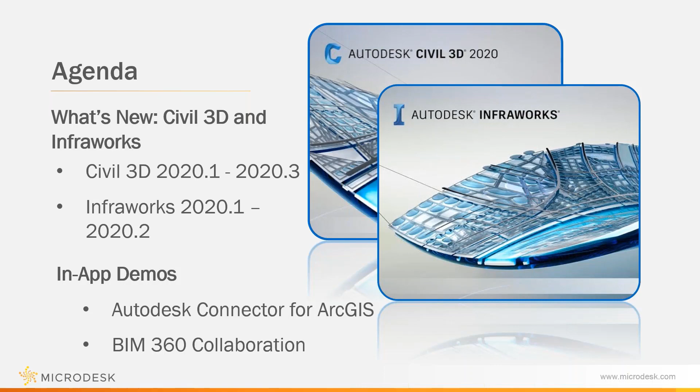Starting off, we'll start with Civil 3D side of things, starting with 2020.1. We have a lot of new features and enhancements here.

The Autodesk Connector for ArcGIS is going to leverage GIS data from ArcGIS Online to create intelligent and dynamic Civil 3D objects. Users also now have access to saving the model changes in your Civil 3D model back to ArcGIS, in addition to publishing a new model to ArcGIS.

The dynamic rail feature lines now allow railway project users to generate, edit, and export parameter-based rail lines that dynamically adjust to modifications of the parent rail alignment, profile, and cant.

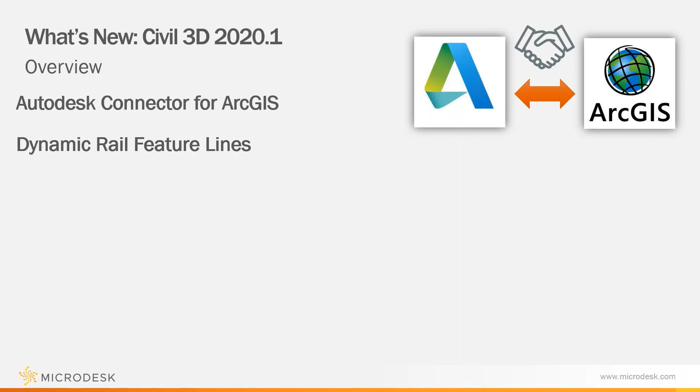Other improvements made for the 2020.1 update include improvements to the reference templates workflow, improved LandXML support for the data exchange of feature lines, gravity network analysis, and improved design efficiency for viewing pressure networks in profile view.

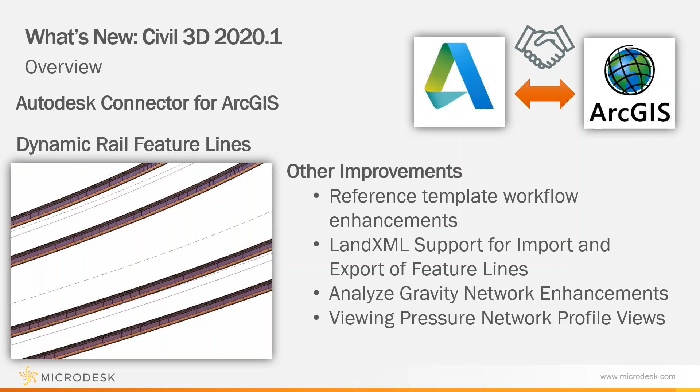The Autodesk Connector for ArcGIS provides an interface for serving GIS data directly and dynamically from ArcGIS to a Civil 3D model. Users can generate alignments, points, feature lines, parcels, and gravity network objects from compatible data types on ArcGIS Online. To access it, click the Insert tab, locate the ArcGIS panel, and click the Autodesk Connector for ArcGIS button to activate the app.

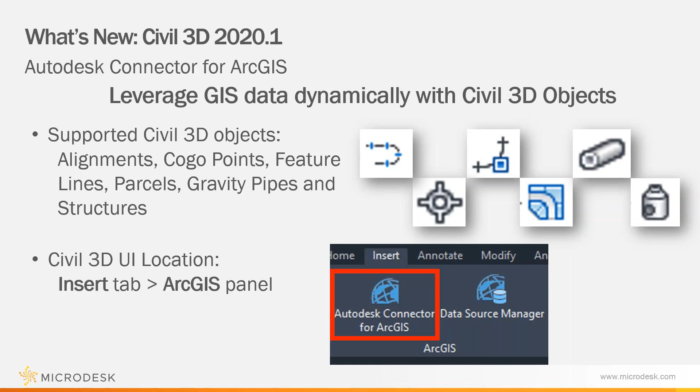The Autodesk Connector for ArcGIS allows users to rapidly and easily create Civil 3D objects from an ArcGIS Online data connection. Search by location and choose an area of interest to import into the map view. You choose which map data to connect to, and this exposes a listing of the data in the feature layers that can create Civil 3D objects.

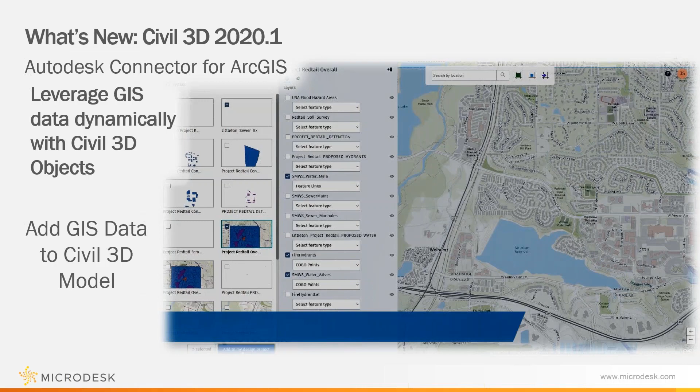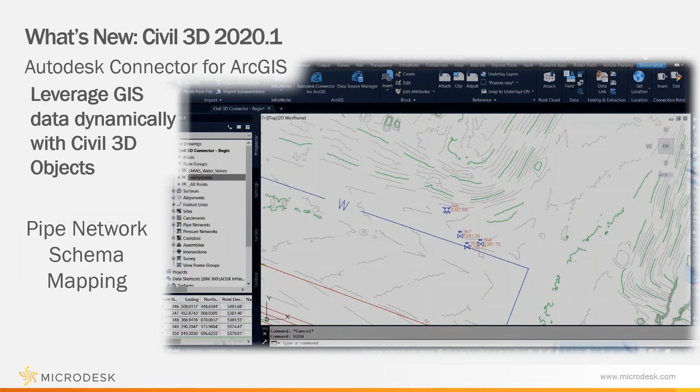From there, you set the model output and choose the object types for each map feature and add to the model. When you're using pipe networks, you can map network schema and move all of that data over into Civil 3D from GIS into the pipe network model.

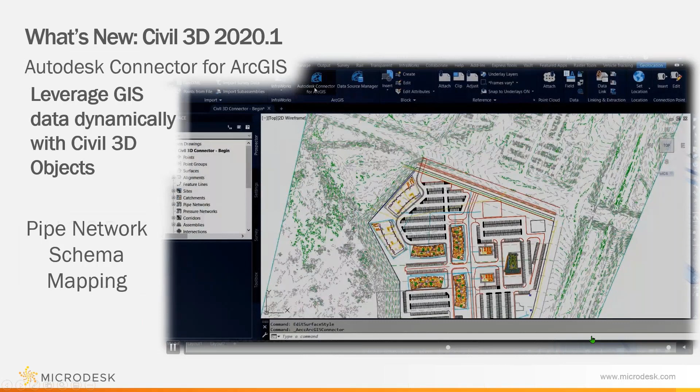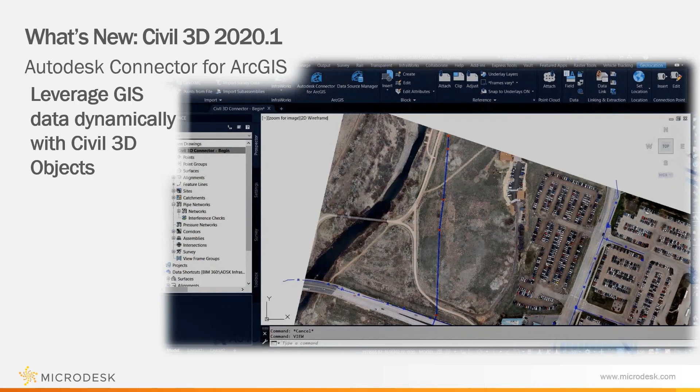Oops. Apologize there, a little technical glitch.

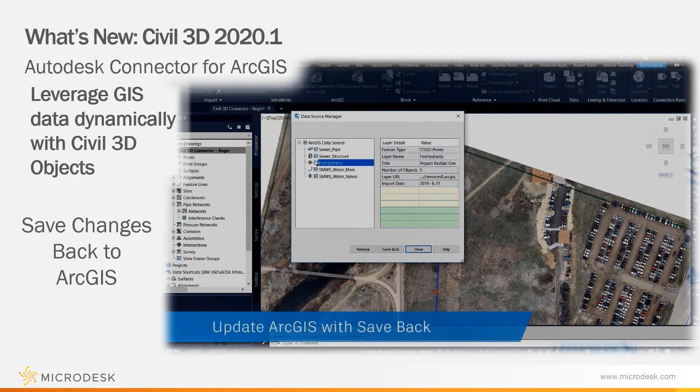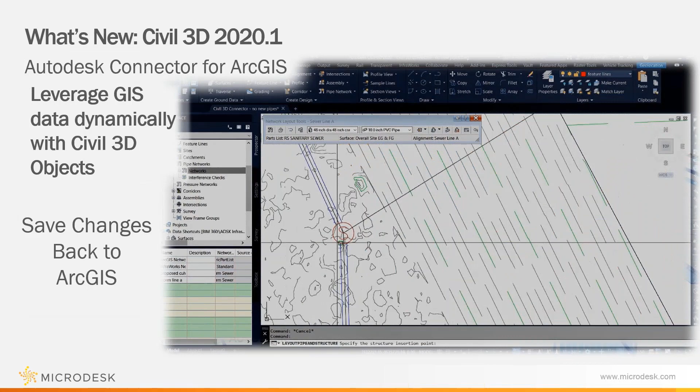We also now have the ability to save the changes back to GIS, so we can round trip the data. When we need to create data in the pipe network model, we can actually publish that new data right into ArcGIS Online.

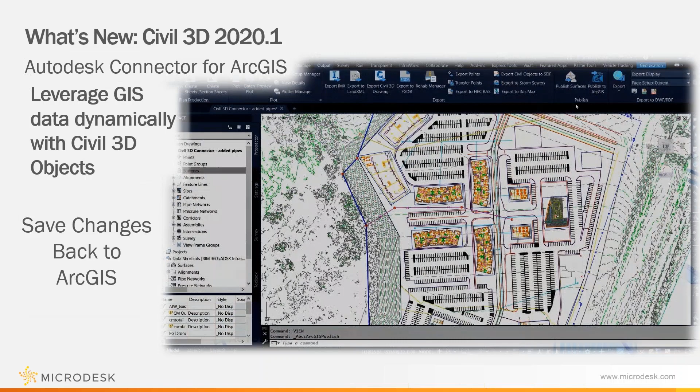Let's talk a little bit about the dynamic rail feature lines. To start off with, you're going to want to create your alignments as a rail type alignment, and then you'll be able to activate these dynamic rail feature lines from the ribbon.

When you create these dynamic rail feature lines, you'll assign a tolerance based on a foot distance or another station-based criteria for placing the elevation vertex points along the feature lines. You can create the feature lines for the center, and the left and right rail lines, and the dynamic behavior is based on not only the alignment layout, but also the profile and the cant.

Another nice new enhancement that we have is the Analyze Gravity Network enhancement. This allows us to now perform in-application network analysis and apply those changes right inside the model. This is something designers have been looking for a long time, just to have that in-application ability to modify the network model.

It gives us the analysis options to resize the pipes and reset inverts. We can compute the energy grade line and the hydraulic grade line. We can perform inlet analysis, and we can even report all that to a very document-friendly Excel format.

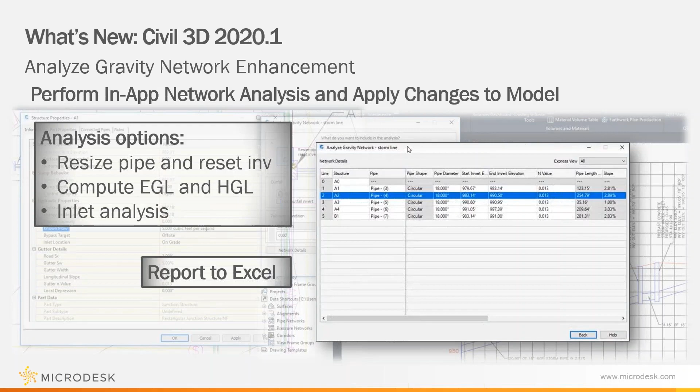It also does a nice thing where it checks the entitlements to make sure people are using the correct software that's compatible with enabling all of these data flows between design applications.

We have file locking and reference support for adding external references and data shortcut references to Civil 3D, so now we can add those types of references for building drawing sets right through the cloud. To access all of that drawing data, we now have the Civil 3D Home tab BIM 360 page, which I'll be showing you shortly.

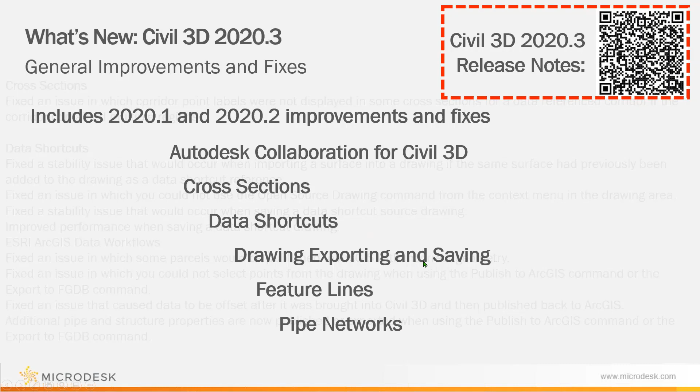All right, let's move over to the InfraWorks side of things and start with the 2020.1 update. The InfraWorks 2020.1 update was mainly based around two pieces: the new user interface, to give it a more modern look and make it more consistent with other Autodesk AEC products such as Civil 3D and Revit, which has the new blue theme. So now InfraWorks has the same type of look going on for it. In addition, some Autodesk Connector for ArcGIS functionality was introduced, and we'll cover that as well.

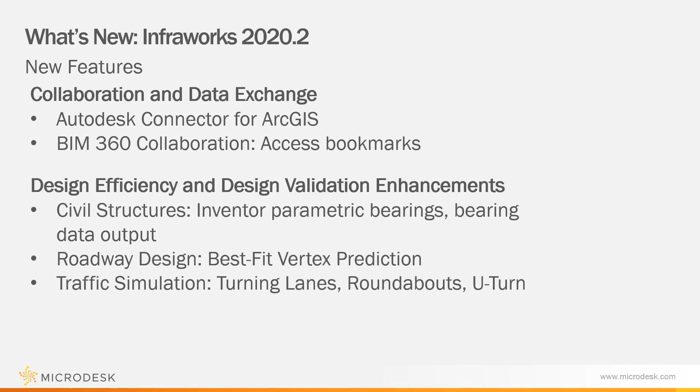All right, so now it's time to look at some in-app demonstrations. I'm not going to demonstrate every single feature, but I'm going to demonstrate some of the standout features, which are kind of the central themes of this year's improvements.

Whoops, not quite ready for that slide yet. So we're going to move over into Civil 3D at this point.

So the first demonstration is to show you how the new connector for ArcGIS works. And the first thing I want to do, before I even bring in any of the data, is go over how to get that data in ArcGIS created.

So I have everything opened up here. And the other thing I want to do is send a big shout out to the city of Cambridge, Massachusetts, for having an amazing GIS system that is super easy to access, comprehensive, and well organized. You guys do a fantastic job, so thank you very much for the data.

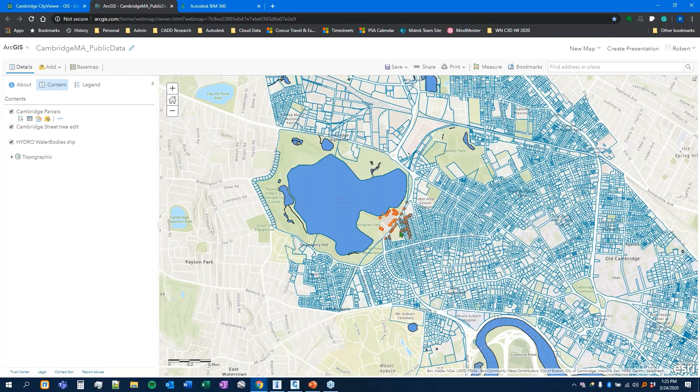So I used a lot of that data to build a model of a small location around this pond right outside of Boston called Fresh Pond. This is in Cambridge, Massachusetts. The project is basically to use this park here and maybe create some sort of infrastructure, like a community center or something, on this beautiful piece of land.

So I've populated a map here, called Cambridge Mass Public Data. This is all easily accessible public data, and it was very simple to put this map together. It's in my ArcGIS online account. I haven't paid for anything - this is free, so anybody can get this data into Civil 3D.

So let's move back to Civil 3D at this point, and we're looking at the same location here. I have my geolocation aerial map turned on currently, so you can see the location that we're in.

So to insert any sort of data, I always want to go to my Insert tab in the ribbon, and I'll search for my ArcGIS panel - you'll see Autodesk Connector for ArcGIS. When I left click on that, it will activate the Autodesk Connector for ArcGIS. It takes a moment for it to pop up.

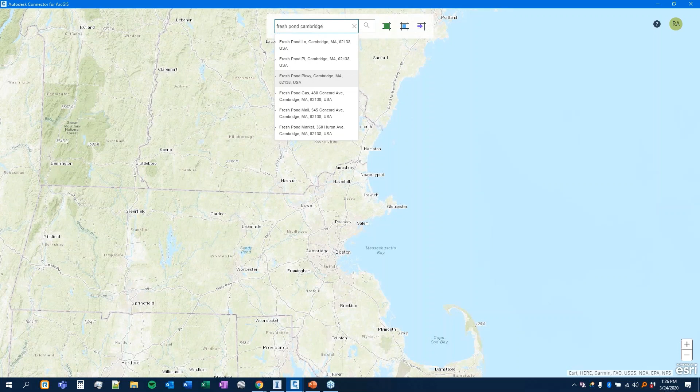So I'm going to search for Fresh Pond in Cambridge. And there it pops up - that's Fresh Pond Lane. We'll just need to zoom back out, and there it is.

So the first thing I want to do is create an area of interest. What this area of interest is going to do is filter out the available GIS data and maps that are available to me, and it's also going to limit the amount of Civil 3D data objects that come in, so objects will only come in within the window.

So I'll choose the area of interest. That looks like a pretty good size chunk there.

So now that I've checked that off, I have a few different options here. First, you can look at content that you own right from your ArcGIS online account. So I created this map here from the public data, so I'm going to choose that first.

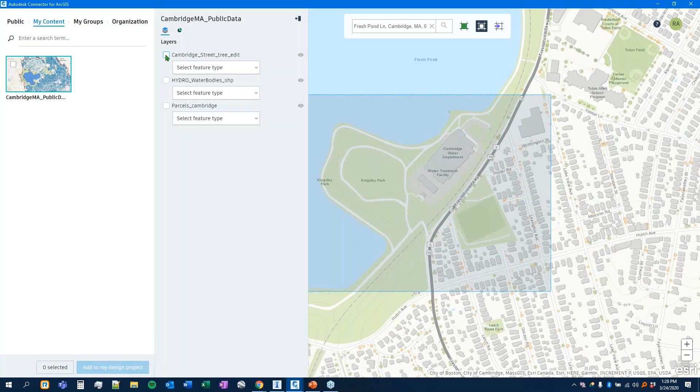And when I choose that, what I can do is choose which objects I want to have come into my model in Civil 3D.

So then you're going to want to choose what data type to bring in. I will want my street trees to come in as Cogo points. I want my water bodies to come in as feature lines. And I have parcel data, so I want that parcel data to just come in as parcel objects.

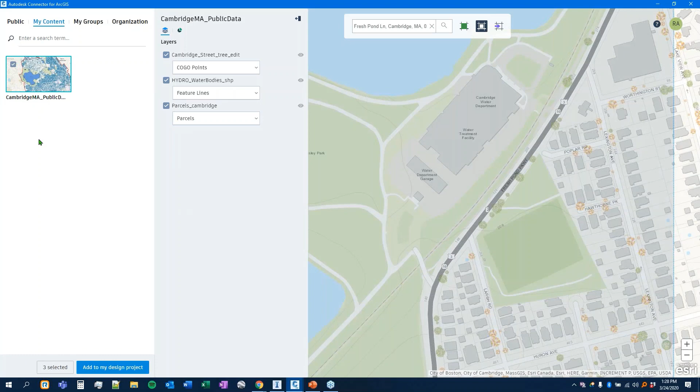So that's it for that map. What about if I want to use a public map? So if I have a public map, now I had created a public map from some City of Cambridge data.

And I just left the shape file name on its own. It's called trans center lines - there it is right there. So I just pick that up right there, I click on it.

Choose the object - so this is all going to come in as alignments. You can see I selected the first 3, and those are still in my selection set. I've got 4 selected now.

Now I'm going to add that to my design project. You give it just a few moments for it to populate, and you'll see it comes in right on target. And there's our data.

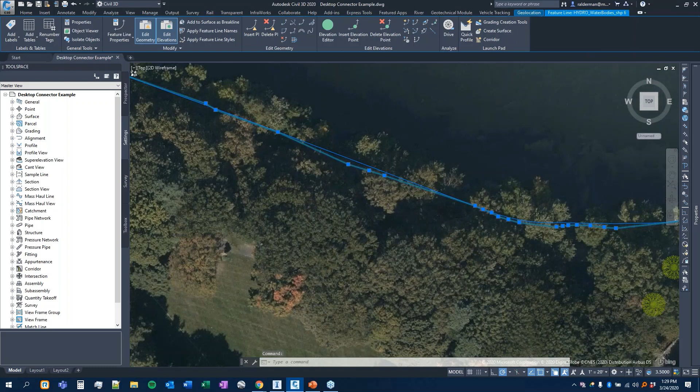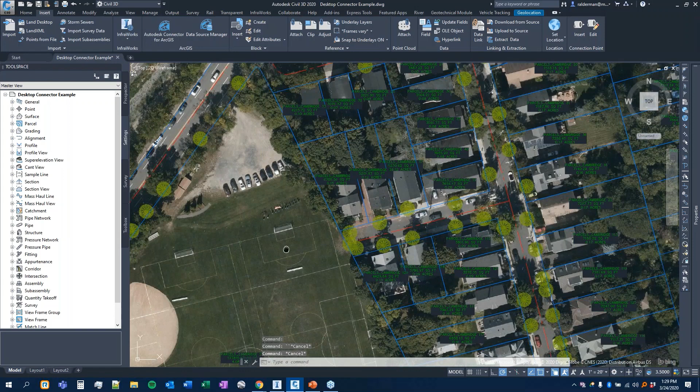So again, here's our water body - we have a feature line to outline the shore. We have a parcel object. We have parcels for the residential areas. We have COGO points for the trees. And we have alignments for our roadway center lines.

And these are all dynamically connected back to ArcGIS online, so you can make changes to these objects and save them back and change the map online.

So let's take a look at how this is actually done on the InfraWorks side now. So I have this model here, the same model called Cambridge, Mass.

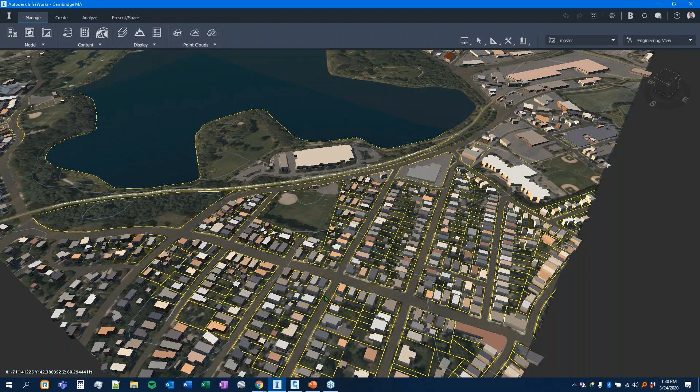Basically, it's the same process. I've already brought everything in, so this is kind of just the finished product. But what you can see is I brought in the parcel data, the road shape files, and the parking lot shape files.

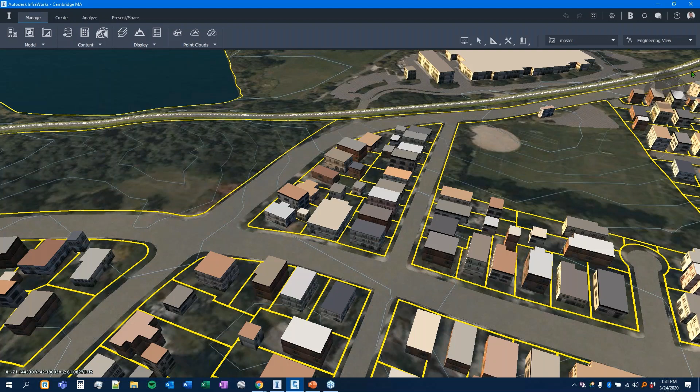Oh, and InfraWorks is wanting to freeze on me. Just give it a moment to think. Maybe switch applications and go back. Always the fun of doing an in-app demo. So I'm just going to move this right back to Civil 3D.

And let's take a look while InfraWorks is thinking. Let's take a look at BIM 360 for Civil 3D. So I'm going to shut this down. This is just my example for how to populate a drawing easily using the connector.

And let's say that we're working here in the Home tab. Notice that we have the BIM 360 page now. So we're able to access our cloud files off of BIM 360 Design and BIM 360 Docs just by staying right in Civil 3D. We don't have to go into our local drive to pull it out and open it. We just need to go to the BIM 360 page. So I'm going to open up my Fresh Pond base map.

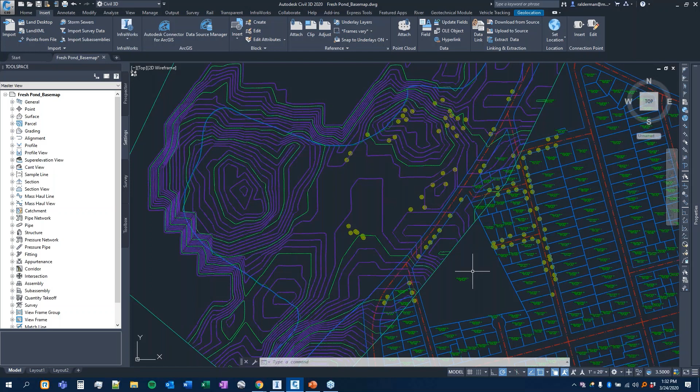So it's going to take a moment or two to open up. But basically, I have just created a conceptual level base model using the ArcGIS data. I have created a Civil 3D surface from my InfraWorks model by importing an IMX file.

The one thing I want to show you here is that there's no real new knowledge that needs to be learned to use BIM 360. It still uses data shortcuts in exactly the same way. It uses an XREF in exactly the same way.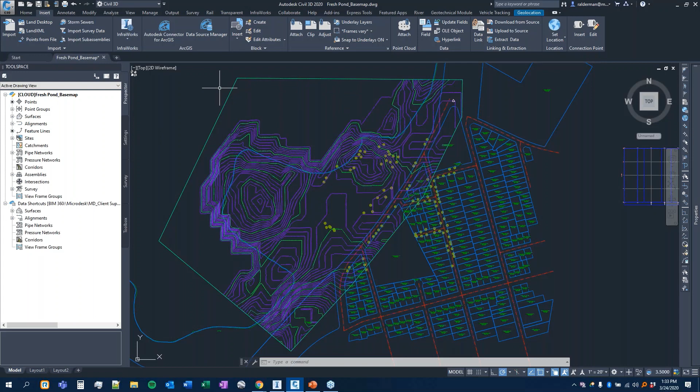Actually, let me show you. Let me open up the design drawing so you can see how that is created. So this is the layout design, and basically, this is just a drawing that was created from XREFs and data shortcuts.

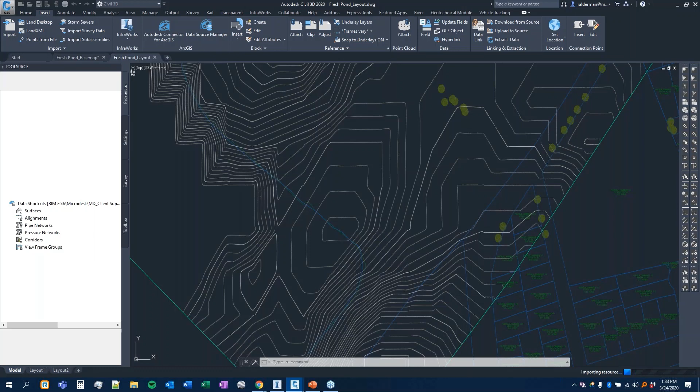And give it a moment here to start up. So as you can see, I have a surface in here. The surface is a data shortcut, as you can see, and there's nothing special about these.

It's just that the referencing functionality has now been provided by Autodesk so that it works over a cloud connection, which was something that was always missing.

So let's bring in an alignment right from the data shortcut project. And again, there's no real difference here about how these are created. So I'll create a reference, still using a proposed style. We'll use the all labels, add that. And there's our center line.

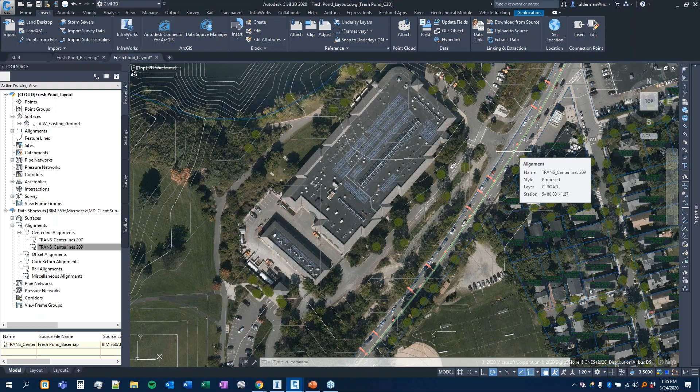Do the same here for the other center line. And there they are. Now we can just go ahead and sample a surface how we always would and start developing an elevation model and creating grading and other layout features.

So let's see if InfraWorks has finished doing its thinking yet. Doesn't look like it has. I'll just restart that.

So let's take a look at the BIM 360 interface. Oops. So when you first start up with BIM 360, when you first log in, the first thing it's going to bring you to is this directory. It wants to know where to go.

So you want to go to your project homepage to start off with, and that's going to bring you to your dashboard. This basically is a user customizable view of the different projects that are being worked on, some tasks that might need to be addressed, pertinent project data.

What we want to actually look for is our document management. So you can see where the documents actually live. So this is the document management system for BIM 360 Docs.

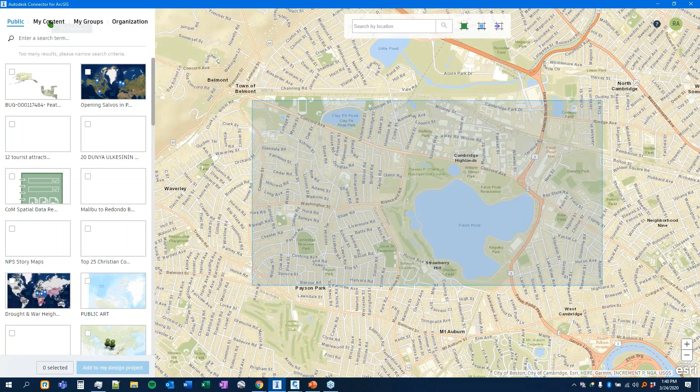So when I go to choose my content, let's just bring in parcels. You can bring them in using InfraWorks objects, so you can build the database out for the InfraWorks model using actual features from InfraWorks. If I was doing this, I'd obviously want to choose the parcels, but since we already have them in there, I'm not going to add them again to the project, but it's the same exact process.

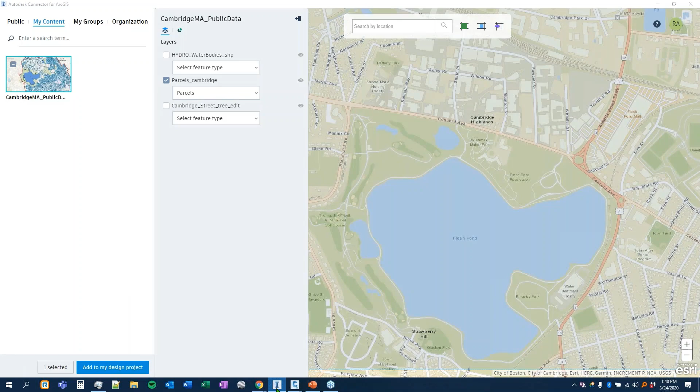Close that. And again, this is the result, the yellow lines for the parcels. They are configurable just like any other layers in InfraWorks, any other surface layers. You can turn them on and off.